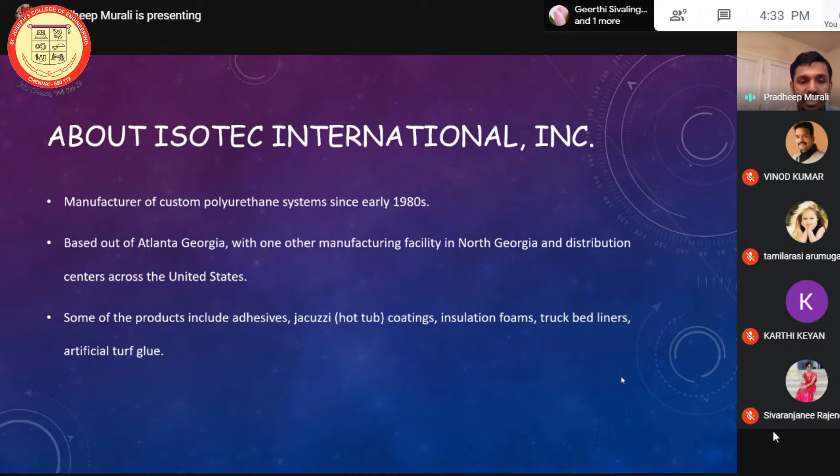To touch base about Isotec International, we manufacture custom polyurethane systems, and we've been in the business since the early 1980s. We are primarily based out of Atlanta, Georgia, and we have one other manufacturing facility around 120 kilometers north of our facility, along with a few distribution centers across the United States to cater to the needs of our customers. Some of the products that we make include adhesives, jacuzzi coatings, insulation foam, truck bed liners, and artificial turf glue. Let's dwell a little deeper.

Just like Professor Karthikeyan said, polyurethanes are two-part polymers which combine isocyanates with polyols. They can be thermosetting or thermoplastic, which means they either alter themselves with heat, or they are immune to heat. One very common characteristic is they're highly hydrophobic,

and this requires very cautious storage and incorporation measures when adding to the reaction vessel. The biggest advantage of using polyurethanes is it adds rigidity and tensile strength to the products. Most of what we do is coatings or adhesives that strengthen the existing products. Some of the common products that the industry is known for using polyurethanes are gaskets, hoses, foam sponges, skateboard wheels,

and automotive suspension bushings. Here's a simple reaction that shows how an isocyanate prepolymer, a prepolymer being isocyanate rich, combines with polyol, and that gives a polyurethane.

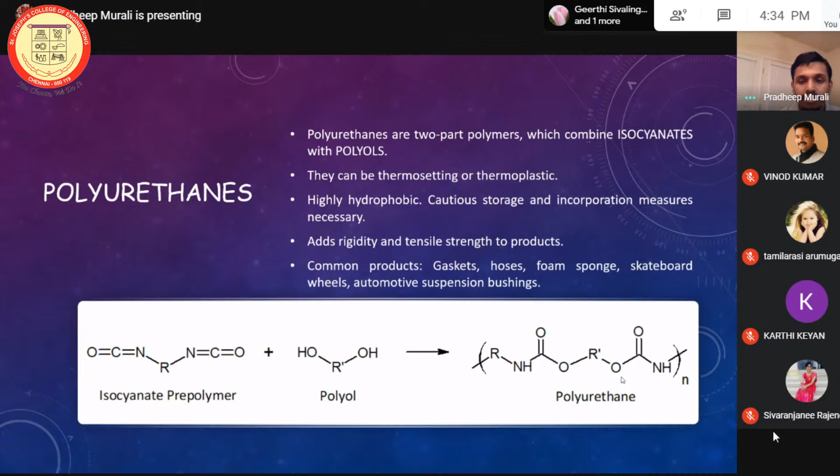They fall under the category of reaction polymers formed by the reaction of two or more isocyanate groups with two or more hydroxyl groups. I've underlined two here because they are polymers, which means the minimum number of groups that should be present is two. If it's one, they become a monomer.

The final product and its characteristics are highly malleable, which means that depending on the polymer chain length, the cross-link, and the flexibility of the segments, you can arrive at different products. The long chains with flexible segments give rise to elastic products, while rigid products can be obtained by a lot of cross-linking in the molecule. Intermediate cross-linking gives rise to foams.

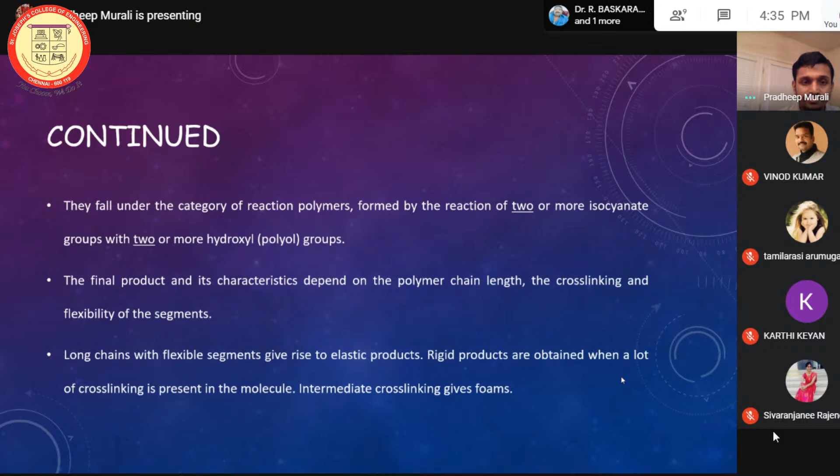Coming to storage, handling, and incorporation of polyurethanes: production raw materials in general must have adequate and proper storage methods. What it means is that right before a reaction is started or commissioned, all the raw materials have to be stored in appropriate places so that they don't get damaged or their structural integrity is not compromised.

It is highly recommended to store high moving raw materials in storage tanks or silos and have them delivered directly to the reactors. This is both a cost-effective measure and an ease from an operator standpoint.

Isocyanates are highly reactive chemicals, and like I said before, they are hydrophobic. They react adversely to moisture and water. Some of the common issues that we come across at Isotec are isocyanates sometimes subjected to condensation, where either an increase or decrease in ambient temperature can alter the chemical structure.

Unless we have proper handling and storage methods in place, this will definitely botch up the reaction, and the final product will fail quality control. MDIs, which stand for methylene diphenyl diisocyanate, are stored and transported in drums under 5 degrees Celsius. It's very important that these remain frozen until the point they have to be added. This prevents dimerization, which forms insoluble white solids that, if added to a reaction or batch, can lead to very high viscosity and mess up the whole batch.

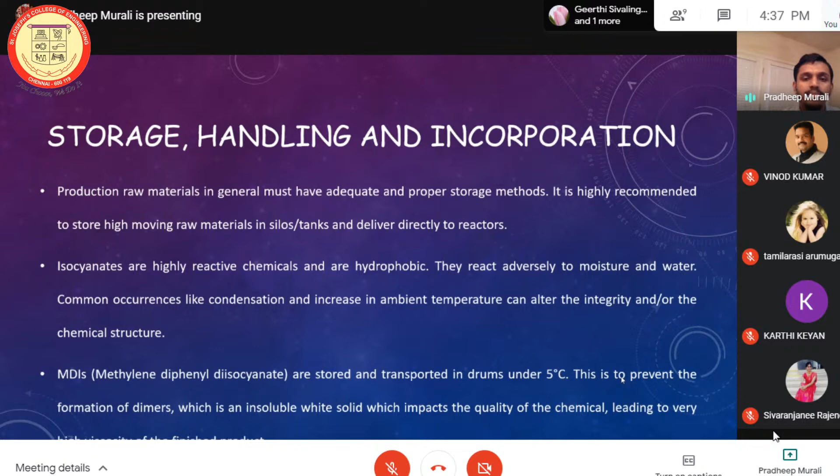We've studied in our coursework that there are two types of reactions: continuous and batch. Continuous reactions are usually where demand is really high and there needs to be continuous production of chemicals, commonly seen in petroleum industries. Polyurethane industries, to my knowledge, are mostly batch reactions because they cater specifically to a customer's need, and it highly depends on the demand and supply equation of a company.

At Isotec, all our products are batch processes. The biggest advantage we have is the ability to have tighter control over the reaction parameters. So even if anything were to go bad, all we have to do is press an emergency stop button, and either we discard the whole batch and restart, or we can make adjustments to the current batch. This may not be possible in a continuous process because it might end up messing up large volumes of chemicals.

Every batch produced is mixed and heated under nitrogen. It's very important that we use either nitrogen or argon because it helps displace air out of the reaction vessel, and air, if it contains moisture, is going to be bad for the reaction and bad for the batch.

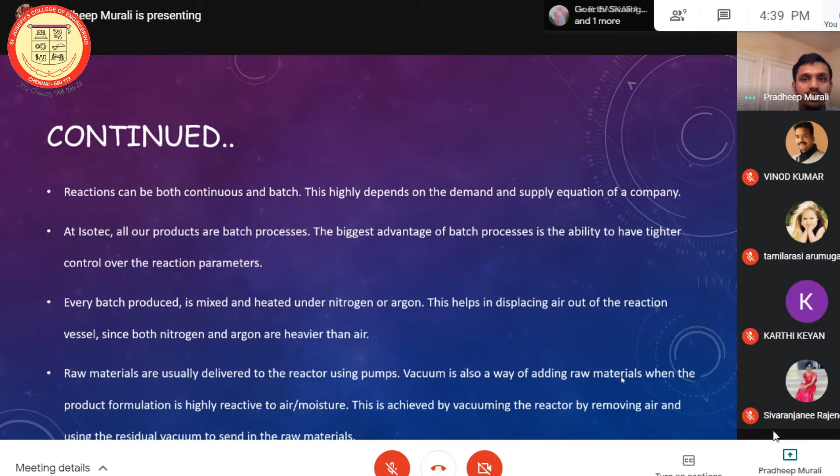Every raw material that we deliver to the reactor, we usually use pumps—it could be diaphragm pumps or gear pumps—and we also have ways of adding through vacuum. Vacuum is used only where the formulation is highly reactive and needs much closer scrutiny. This is achieved by vacuuming the reactor and using the residual vacuum to send in the raw materials.

Polyurethane systems—we call them systems because they're two parts, isocyanate and polyol, or iso and poly—generally fall into three categories. First, customer specific products: the manufacturer develops products specific to a customer's application. That is where Isotec currently stands. We have salesmen finding customers, or customers finding us online and telling us their application and what they want to do, and our chemists and R&D department get on it, find a formulation,

and see if it pleases the customer. Market specific products can be more called consumer products, meaning they already have a foothold in the market, and all we do is try to come up with a competitive product that could either increase our sales or give a better product to the customer.

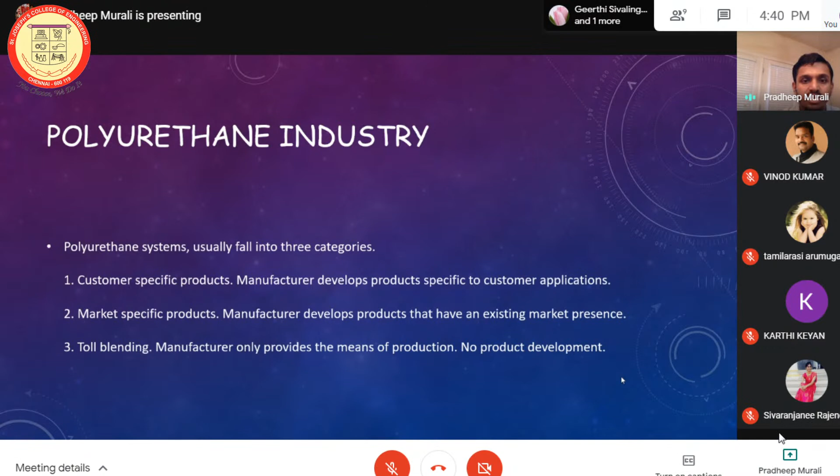The third common category is toll blending, where all we do is provide the means of production. The customer gives their formulation, tells us what to do, and in some cases even supplies the raw materials, and all we do is mix them and complete the reaction for them. There is no product development involved in this stage.

Some of the projects I worked on at Isotec: MDIs need very careful storage, and we had problems with dimerization in the past, so I designed a heated water bath to mitigate this issue. The heater ovens we currently have heat the air around the chemical drum or storage container, which causes uneven heating and leads to dimerization. A heated water bath would have uniform heating throughout the whole vessel, helping reduce dimerization, and we were able to achieve 50 to 60% increased efficiency per drum.

Another project was a solvent recirculation system to subject cured adhesive in a filter housing to an industrial solvent. We have a formulation where we make adhesives—you might have heard of super glue or gorilla glue—and right after production and packaging is complete, the filter housing used gets solidified once it comes into contact with moisture or air. So it's very important that this filter housing be cleaned before the next batch begins. I was able to design a system where recirculation of industrial solvent was used to clean this process.

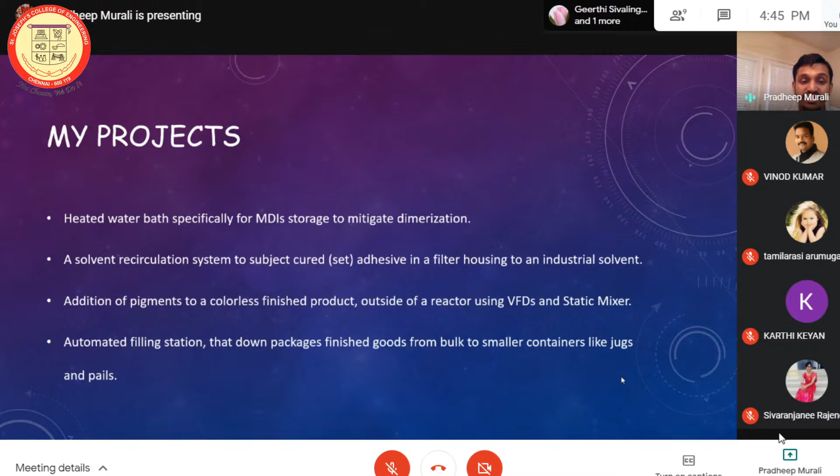When we got a customer who wanted us to both make the bulk product and down package it, it was a tedious process, because we filled gallon jugs to manufacture 800-900 gallons, and filling each one individually was a tiresome and time consuming process. With the automated filling station, all the operator had to do was place the jugs, press a button, and it gets filled. That was my first exposure to automation.

Safety and precautions: when it comes to polyurethane or any chemical, PPE is very important. Respirators are a must when handling isocyanates, and are highly recommended during the packaging and finishing of goods.

Even during the regular handling of chemicals during the batch, we use high density polyethylene suits, so that it prevents damage to either your clothing or yourself. We also use face masks and splash guards.

Every reactor must be properly sized to install pressure relief valves to prevent overpressure scenarios. This really comes into use when a new formulation is developed for the first time. It's not an easy process, as an engineer, to foresee what could go wrong going from a lab scale to a production scale. If we don't have all these safety features already figured out, it might end up being a really bad case.

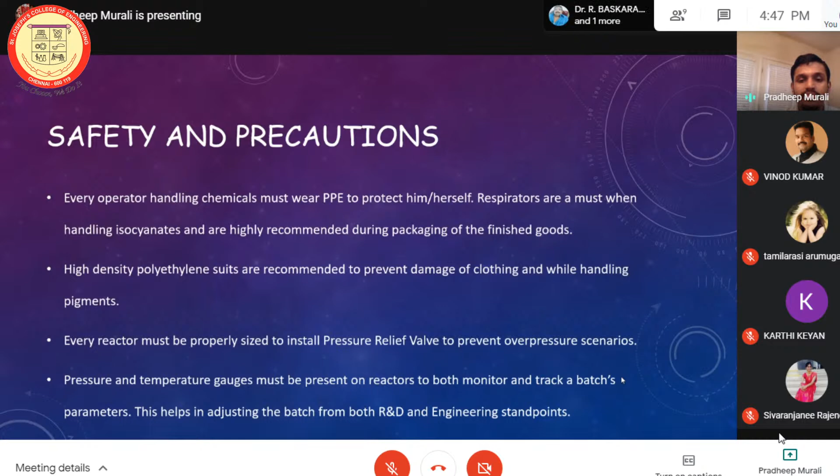Pressure and temperature gauges are also very important, because they help monitor and track a batch's parameters. This helps in adjusting the batch both from an R&D and engineering standpoint.

Let's move on to automation in the chemical industry. Automation is of three types: fixed, programmable, and flexible. Fixed automation is where you have a certain product that needs to be made a certain way, and that's how it's going to be made always.

The biggest example for this would be cars and automobile manufacturers. For example, if they have a Toyota Corolla being built on one line, it's going to build a Toyota Corolla always. You can't have a Toyota Corolla and then a Toyota Fortuner or a Toyota Camry all put together in one line. So that's fixed automation. The programs are set, the robots know exactly what they want, and the parts are supplied. It's very important to know that the parts will be different for each vehicle, so that's why it's called fixed automation.

Programmable automation is where, to cite the same example, let's say the tires on 5 different Toyota vehicles are all going to be the same, which means that up until the point tires get put together, they are fixed automation. When it comes to tires, any car or vehicle can go through this line, and it's easy to program accordingly. This gives control from one very specific instance to another. Flexible automation is where you can change the parameters right in the middle of production.

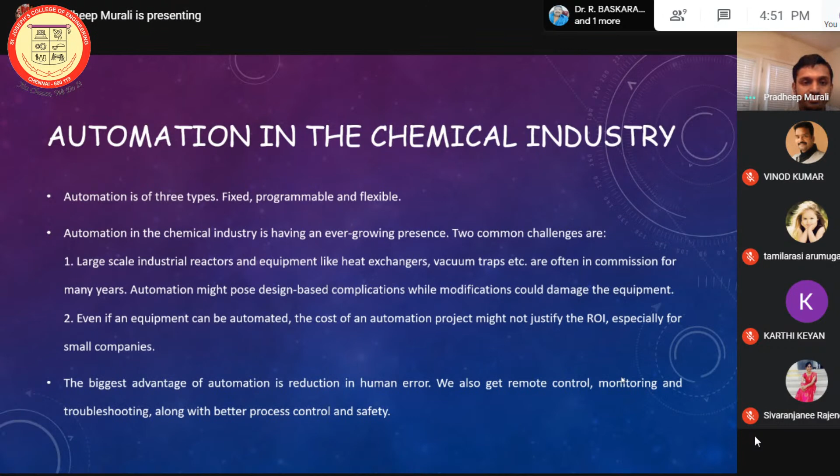Some examples I've worked on that I can show you today include the addition of raw materials to the reactor. Right now, I'm working on a project where every silo in my plant should be able to deliver products directly to the reactor. Right now, we have most of our products getting added from drums or totes. A fully automated system incorporates the required amount directly from the storage tank with the press of a button. And you have to imagine there's going to be long lengths of pipelines.

If an operator has to individually go and open and close these valves, it's both time consuming and could be prone to error. That is the main issue, the main goal here: to prevent errors.

Safety measures are much easier to implement when the equipment and reactors are automated. For example, the contents of a reactor need to be heated to 100 degrees Celsius. If the system was not automated, the operator would have to turn off the heater once the temperature reaches that point, and turn it back on if the temperature drops. An automated system takes care of it by itself, knowing that when it hits 100 it needs to turn off, and when it goes below a certain temperature, it turns back on. It's able to give us that control without the operator needing to be present - they can be on their break, and the system would take care of it.

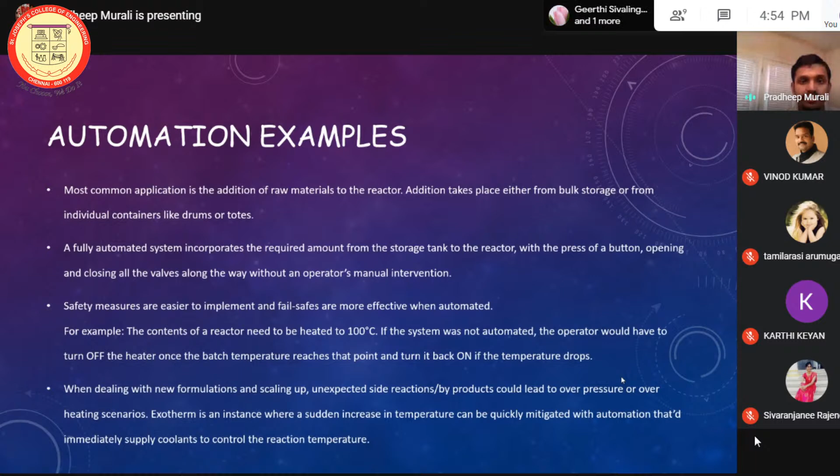When dealing with new formulations and scaling up, unexpected side reactions could lead to overpressure or overheating scenarios. Exotherm is something that on a lab scale we may not notice, because lab scale uses very small quantities to complete a reaction. But when it comes to production scale, it could pose a threat. This can be quickly mitigated with automation that would immediately supply coolants necessary to control the reaction temperature, or turn off the heater.

Chemical engineers and automation. Though we have been exposed to electronics and electricals, and we've been to all those EEE and ECE labs, it's still not our forte. We as chemical engineers do not primarily involve ourselves on the automation side of things. But what I learned the hard way was, if you know automation, if you can understand automation, and if you can make yourself well-versed, it makes you more employable.

I've seen it firsthand. It's easier to implement automation than we think it is, because chemical engineering is one of the toughest engineering courses out there, and if we can do that, automation should be an easier task for us.

I highly recommend for you students to at least get an introduction to automation. Automation, of course, has a lot of programming. Programming is how we achieve automation. It's easy to throw around the word automation, and what we see outside is just the press of a button and everything gets done. But what goes on in the background is much more than what we see.

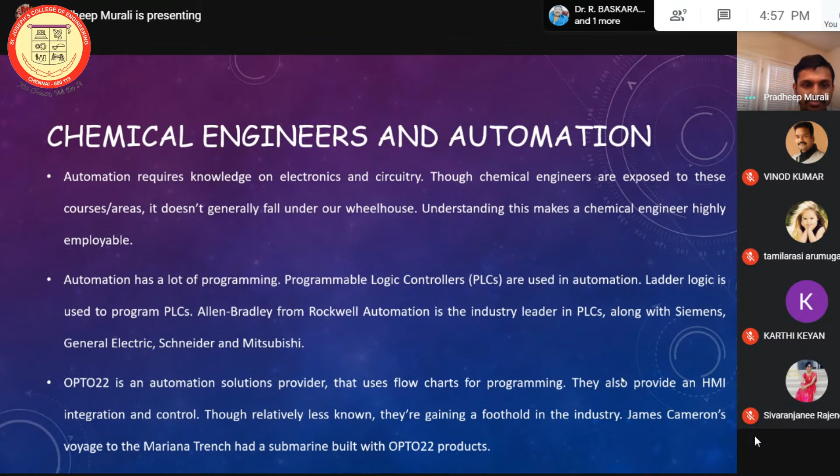So that concludes my technical sharing of knowledge, and let me get into how you can make yourself better. You need to increase your visibility. It's very important to work outside your regular coursework to become more employable. We have 4 years of knowledge, but there needs to be effort beyond that knowledge to make ourselves or sell ourselves in the market.

To be very frank, we need to know PIDs, and we need to be able to implement piping and instrumentation diagrams, and CAD. CAD is becoming a very common tool that everybody needs to know. Aspen, MATLAB, and COMSOL - this is more towards process engineering and the petroleum industry, but we need to have an understanding of that. Ladder logic, just like I explained before, is about PLCs, and knowledge on that makes you more employable because the world is moving towards automation.

Six Sigma and lean manufacturing, though this does not fall under chemical engineering, is still an industrial engineering concept, but it makes us understand how things go on the production floor. Project management encapsulates all these things about every single aspect of a project, so it could be procurement of raw materials or equipment, up until the point you send it to the customer, troubleshooting and maintenance. We have courses in project management, and PMPs, project management professionals, are needed more than ever right now.

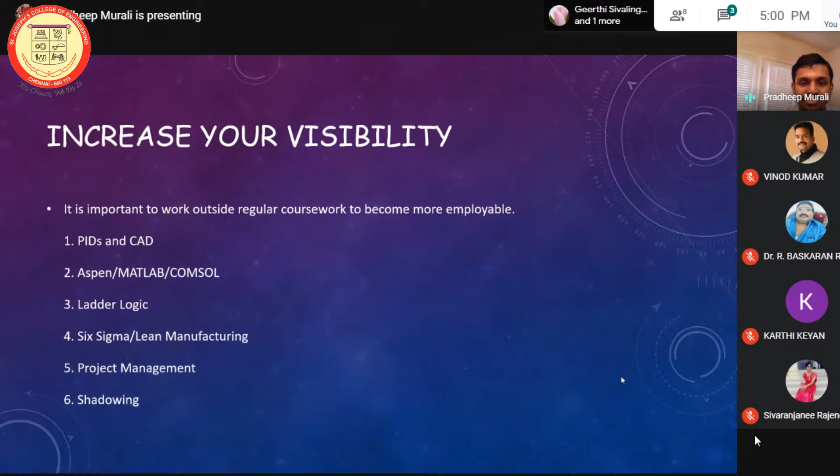You have to go and talk to people who are currently successful or currently working in the industry. Talk to them, ask them what they did, ask them if you can take a look at their plants. It may be a one-day visit, but it's important to talk to people who already have that knowledge. Every professor in our department is highly knowledgeable, and I'm pretty sure if you ask them, they'll guide you in the right way. I failed to take that advantage, but please don't make the same mistake I did.

To end with my transition, the aptitude tests, which I believe would still be happening with respect to placement, had a very big effect in how my life turned out. And when I was in St.

At St. Joseph's, all I thought was this is useless and a time waste. But the structured approach really helped turn me into what I am today. It helped me crack my GRE, get a good score in TOEFL, and helped with my university application. And of course, doing all that got me a good letter of recommendation from the professors. The statement of purpose is how you get into universities, and these aptitude tests played a big role.

When I came to the US, it was more of a cultural shock. It took time to get adjusted to the way people think here, their accent, and how things are perceived here. I think that would be one big challenge everybody would face when they move out of the country.

The US education system is not as tight as the Indian education system. To be honest, we were handed things on a plate at St. Joseph, literally, everything we needed, we got it. Like they said, you choose, we do it. So they did it, but I never appreciated it. When I came to the US, I understood how things were really easy for me at St. Joseph, and I failed to make use of it.

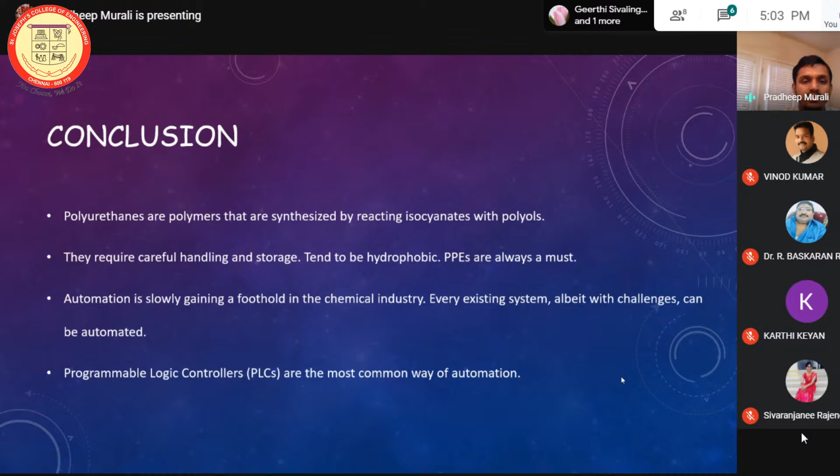I hope I did not bore any of you here, but here's the conclusion. Polyurethanes are polymers, with at least two monomers, that are synthesized by reacting isocyanates with polyols. They require careful handling and storage, and they tend to be hydrophobic. PPEs are always a must. Automation is slowly gaining a foothold in the chemical industry. Every existing system, though it will have its own challenges, can be automated. Programmable logic controllers are the most common way automation is achieved in today's world.